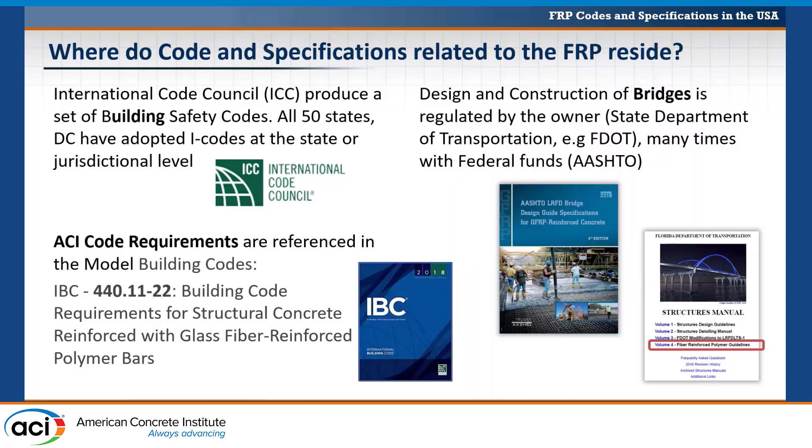So what I'm going to be doing in the next 5 minutes, because I already spoke 5 minutes, is give you a little bit of a feeling for where that information is. And as we go into our panel discussion, I'm happy to expand a little bit more on that.

So first thing, a little plug for what ACI 440 is, especially for our international members. I know you have seen ACI 440 documents out there in the world, but who is ACI 440? We're a technical committee, part of ACI. ACI has more than 130 technical committees, and our committee is one of them. Our purview is to look at how we disseminate information that deals with FRP reinforcement, both internal and external. As you can see, we have many subcommittees. We are always looking for new members. We welcome new knowledge, new information.

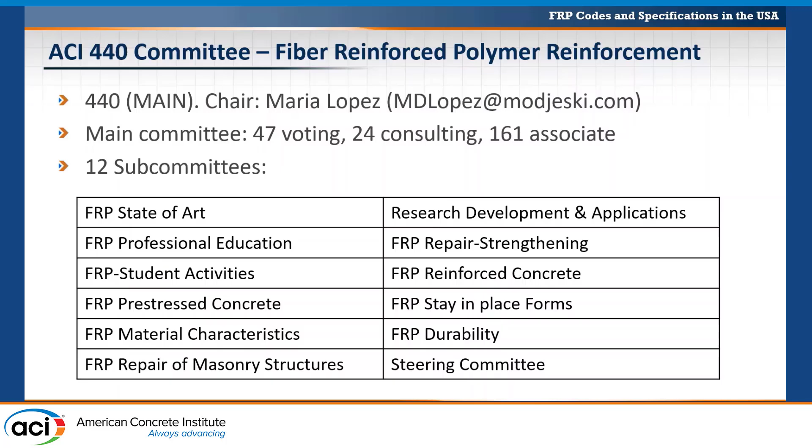It is an open work. If you come and join our subcommittees and you're interested in participating, we will welcome you with open arms. So please feel free to take the opportunity of being at this ACI convention to also come and sit down in our subcommittee meetings, both on Sunday afternoon and Monday during the day. And we have a Tuesday main committee meeting. Come and listen. And if you think that you have something valuable that we should hear about or know about, please come and join us. I'll be happy to introduce you to the subcommittee chairs or whoever is in charge of the task that might be interested in getting your information.

So ACI 440 has been very, very successful and very active. We have up to today 21 published documents. And what I'm showing here is just a sample of those. But you can see that we have developed and published code documents. We have developed and published guide specifications for materials, construction specifications. We also have tech notes. And as you can see here, the gamut of the information that we present is not only for internal reinforcement, but for external strengthening and repair as well.

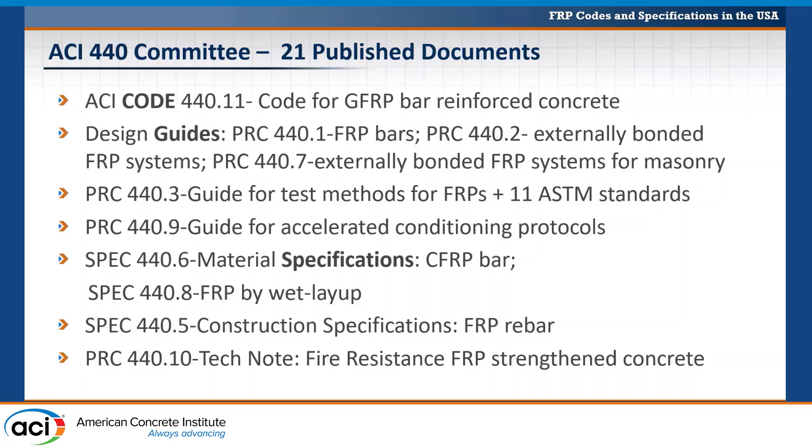So if you are working for a particular agency or a particular owner and you need that information, it could be that there's an ACI 440 document that can help you. And the important thing, again, that we're doing here in the US is to find these really clear ways of sending information out there. Right now we have one good document that we can use as a code, but a lot of the Departments of Transportation do use some of this information and they do reference those in their documents.

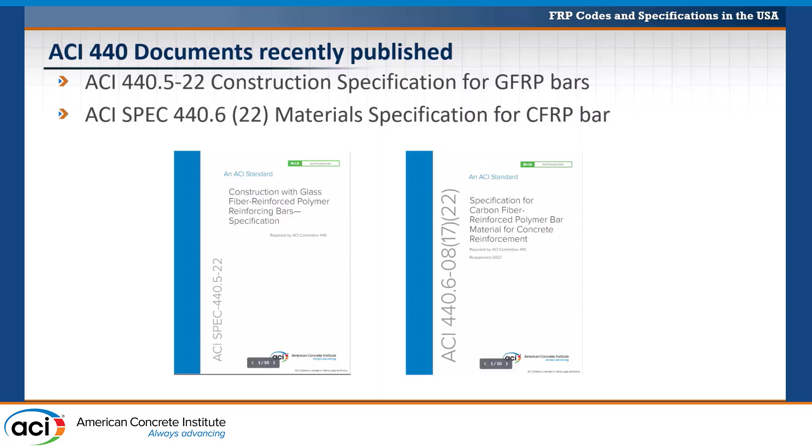So here we have a construction specification for GFRP bars. We have a material specification for CFRP bars. And again, all these documents are available on the ACI website. We recently published a guide for externally bonded FRP for strengthening. And I want to put a plug in this because, as I've seen how these documents are used abroad, especially in South America, this document is one of the most widely used documents out there. And they are using it almost as a code document. So in our evolution, now we are going into a code document that actually codifies all of this information so it can be adopted. But as of now, this document has been updated and it was just published last December.

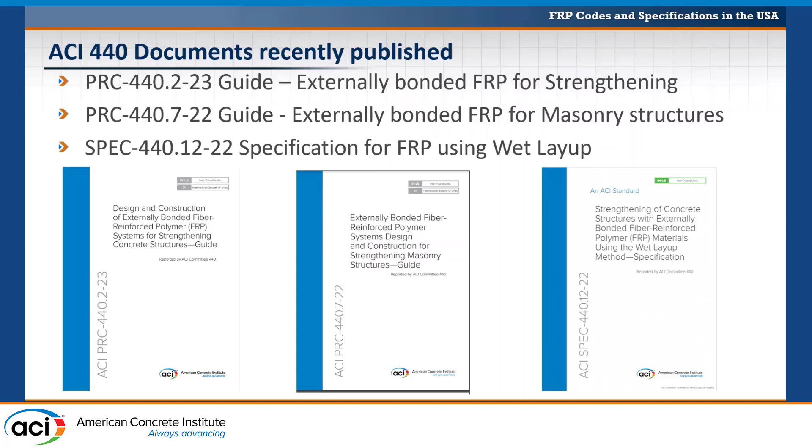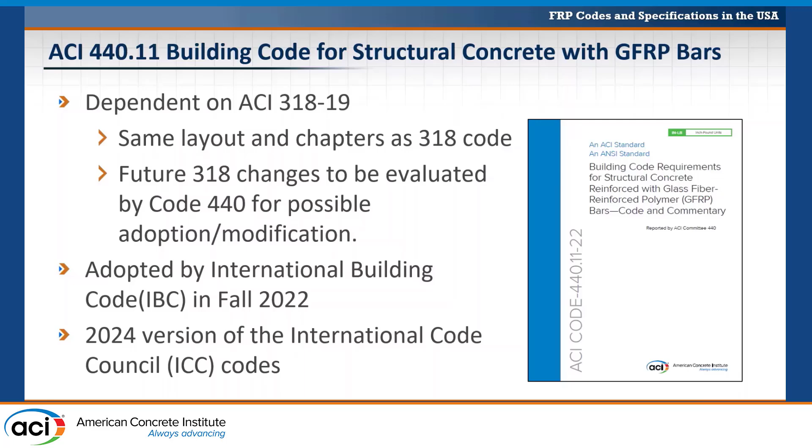I want to talk a little bit about the code 440.11 that deals with internal reinforcement with GFRP bars. At the beginning of my presentation, I was talking to you about ICC, the International Code Council, and the IBC, International Building Code. This is a document that is very referenced by those two entities. This document is in the same structure as the ACI 318 code requirements that many of you are familiar with. ACI 318 deals with internal reinforcement with steel rebar. Now we have a document that follows the same format but deals with GFRP reinforcement. So it's organized in the same way. It's easy to follow. And again, it has been adopted by IBC and ratified by ICC. So in any jurisdiction where you might be designing a building where ICC or IBC is being used, you could now use and reference the code 440.11.

A little bit of information. I know some of you might be asking these questions. What does that code cover? It covers beams, one- and two-way slabs, columns, walls, foundations, joints and connections between members, and strength evaluation of existing structures.

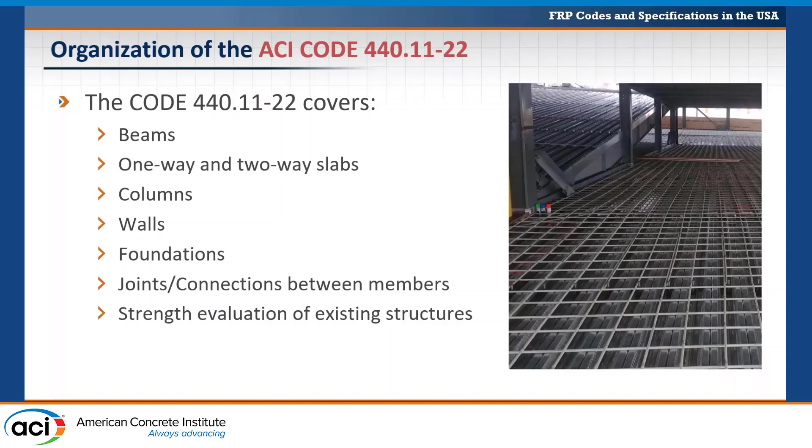I know some of you are going to ask this question, so I'm giving it to you right now. What is not there? Well, we got version 1.0, so what is not there is diaphragms, which are definitely going to be included in the next edition, anchoring to concrete, earthquake-resistant structures, and strut and tie models. So these are areas that were not included in the first edition of this code that deals with GFRP reinforcement.

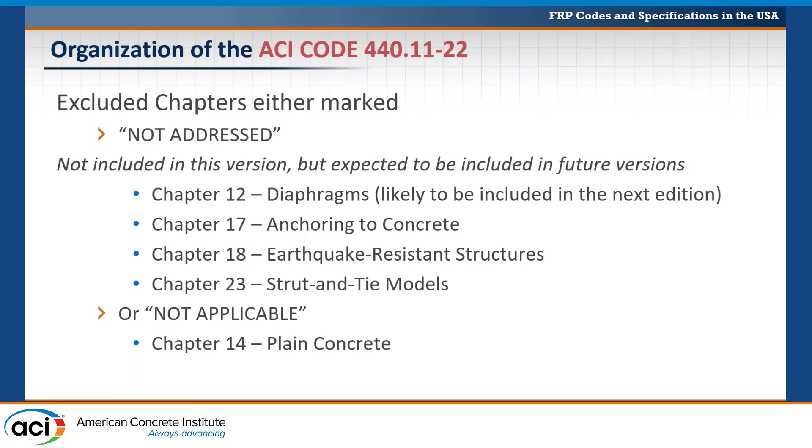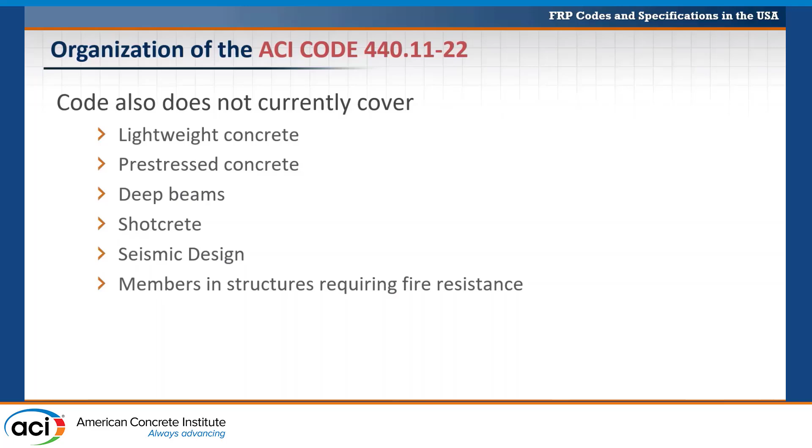It doesn't mean that we're not working on those topics at the 440 committee. If you have knowledge and information on any of these topics, please come, because we're right now working on developing the next version of the code. Things that were not covered in addition to those: pre-stressed concrete, deep beams, like the strut and tie that we're talking about, shotcrete, again, seismic design, and members and structures that require fire resistance, something very important.

A little plug here on another code document that is being developed, not by the ACI 440 committee, but by a committee that was created specifically for this, but many of the members are from the ACI 440 committee, so we're very close cousins. And in this case, this document is going to be code language. It's going to be referenced in the ICC. And this document is the strengthening of structural concrete with FRP systems. It draws on the 440.2R document that I mentioned earlier.

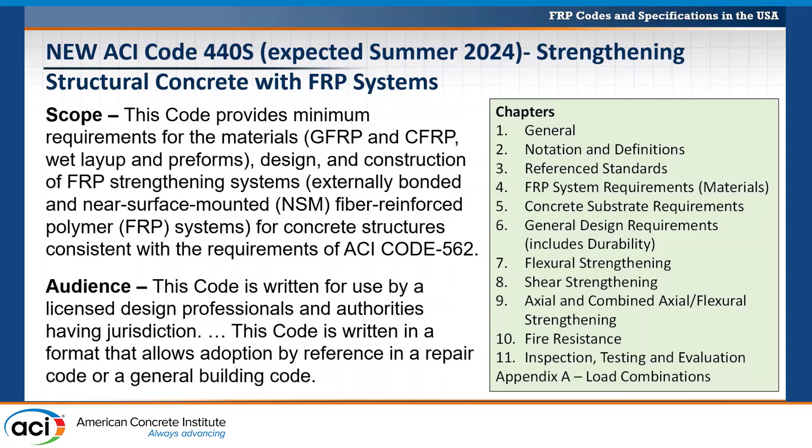And as you can see here, this is the scope of the document and the audience. There are some chapters that show you how the different topics are being presented. And we're expecting to have it ready and available for the public in summer 2024, so this year. So now you're going to have two documents that the licensed design professional is going to be able to reference in their design: one for internal reinforcement and one for external FRP bonded systems.

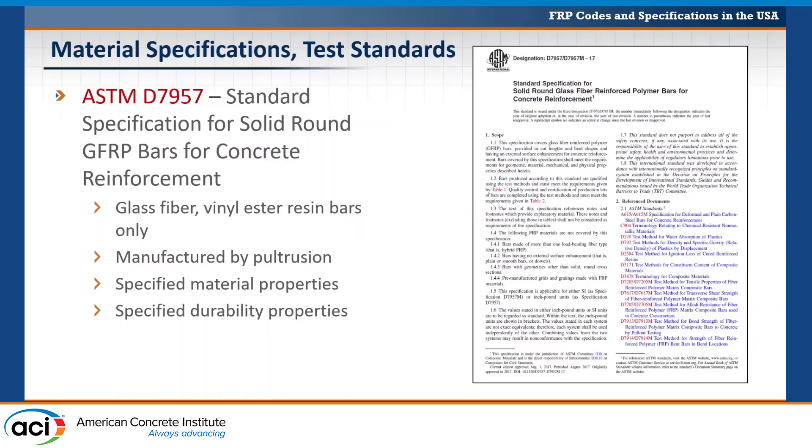Moving into who else publishes technical documents that deal with FRP: we shouldn't forget ASTM publishes test material specifications and test methods, and there is a committee and a subcommittee that is especially devoted to that. If you're interested in that work, please come talk to me or my dear colleague, and we'll put you in touch with the right individual to contribute. And now I'm going to switch a little bit. Do I have 1 minute? I'm just going to do a little plug into AASHTO.

So what is AASHTO? Well, if you want to design bridges, you're going to have to look at what AASHTO does. AASHTO is the American Association of State Highway and Transportation Officials. It's a standard setting body, so it's different than ACI. Their mission is to develop specifications, test protocols, and guidelines that are going to be used in highway design and construction in the United States. They have two committees that specialize in FRP related documents: the committee on concrete and the committee on specialized structures.

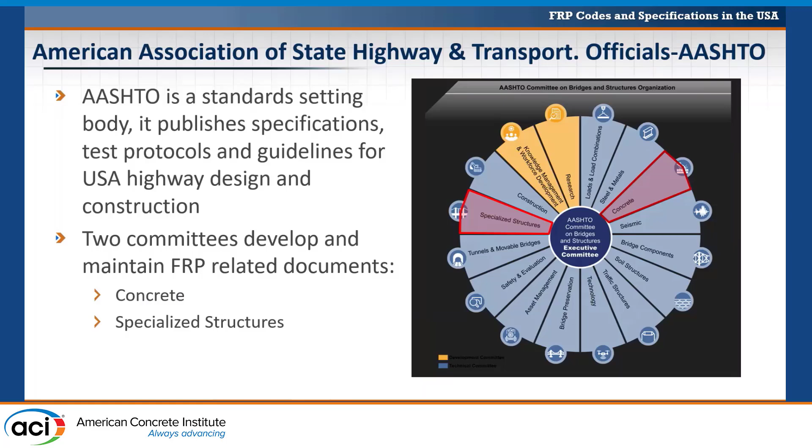So I think this will be a good stop for me. I have additional slides on specifics of the different documents and what they're going to change in the future. But I think this will be a good point to stop, and maybe have the next speaker come and tell us their information.